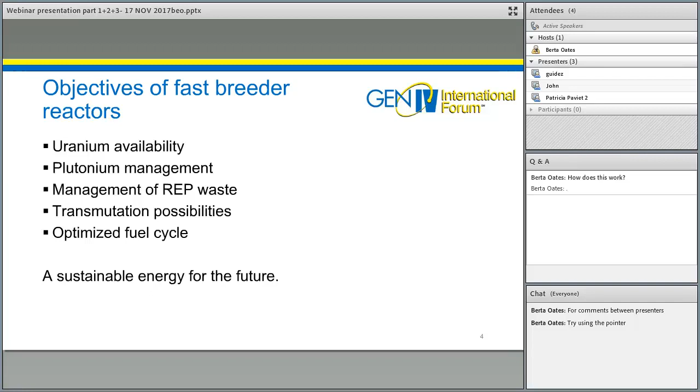Some words on the optimized cycle of the fast breeder reactor. You see on the scheme the reactor optimized cycle, with the possibility to fabricate fuel using depleted uranium, which is very available today, and plutonium obtained from reprocessing fuel. With depleted uranium and plutonium, it's possible to fabricate fuel and use it in the fast reactor. Afterward we carry out recycling activities, and we end up with very little waste, only 4% of the fuel.

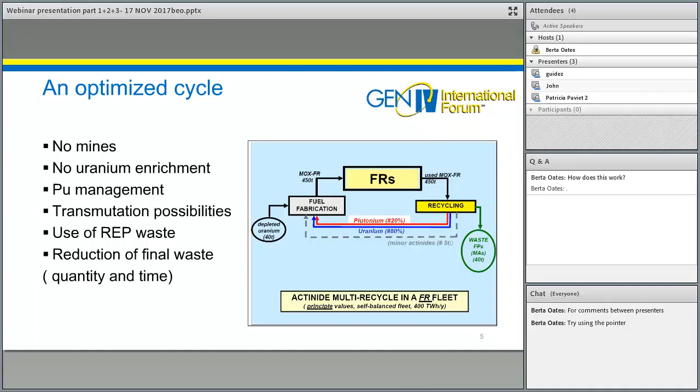For this optimized cycle, we need no uranium mines, we need no uranium enrichment facilities, we can manage the plutonium, and we can also carry out transmutation of the actinides, which decreases the time of toxicity of the waste. We can burn all the waste produced by water reactors, and we obtain a drastic reduction of the final waste, both in quantity and in time.

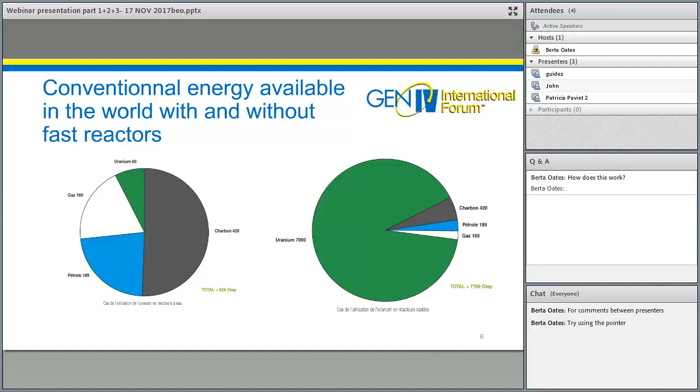With the fast breeder reactor, in the schema we can see the conventional energy available in the world with and without fast reactors. Without fast reactors, using only conventional energy, coal remains the main energy source for the future, which is very dangerous for the planet and for climate change. If we use the fast breeder reactor, we see that uranium can become the main conventional energy used in the future.

In GIF, the International Forum, we have 4 types of reactors that can be fast reactors: sodium reactors, lead reactors, molten salt reactors, and gas fast reactors. But the only type that has been built and operated is the sodium fast reactor. For the molten salt reactor, there was a US prototype many years ago, but it was not a fast reactor. And for the lead reactor, we only have experience with lead-bismuth reactors on Russian submarines.

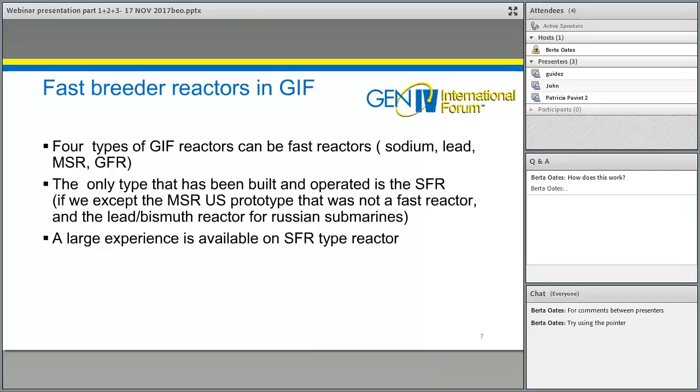There is a large experience available on sodium fast reactors in the world, and in France also. The first nuclear reactor to produce electricity was a sodium reactor, the EBR reactor, in 1951.

20 sodium fast reactors have been built and operated in the world. A lot of countries have worked on this type of reactor: the USA, Russia, France, Japan, India, China, UK, and Germany. The last one to have started is the BN800 in Russia, 800 electrical megawatts, connected to the grid in 2016. And now in India there is a 500 electrical megawatt reactor that should start next year. So you see there is a large experience in the world on this type of reactor.

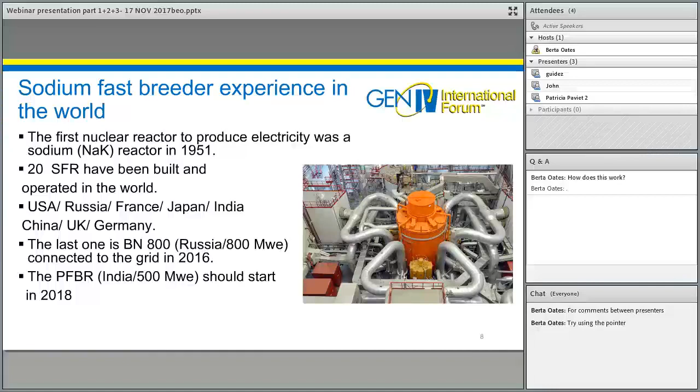For the French experience, we have had 4 phases. The first was Rapsodie, from 1967 to 1983, a small reactor of 40 thermal megawatts. After that we had Phenix, from 1973 to 2003, operating at 250 electrical megawatts. Then Superphenix, which began to operate in 1985 and stopped in 1997, at 1,240 electrical megawatts. After the closure of Superphenix, Phenix restarted following a safety evaluation, from 2003 to 2009, but restarted with only two-thirds of its power, meaning 170 electrical megawatts.

So we see that in France we have a big experience on this type of reactor.

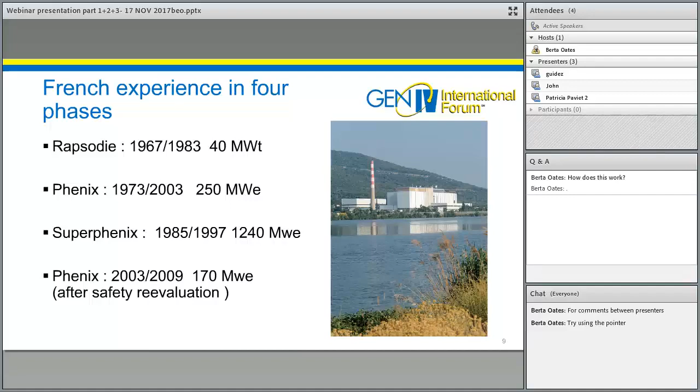The Rapsodie experience was a small loop-type reactor built mainly to test materials and fuel, with no electricity production. The aim was to test materials for structures, components, and fuel assembly during the reactor's life. This experience with structures, components, and fuel was used for Phenix, since Phenix was built during the operation of Rapsodie. A lot of corrosion problems with fuel pins were studied in Rapsodie and resolved. At the end of the reactor's life, very interesting tests were carried out, particularly tests where the sodium coolant flow was stopped at nominal power without any control rod shutdown, to show the intrinsic safety of this type of reactor.

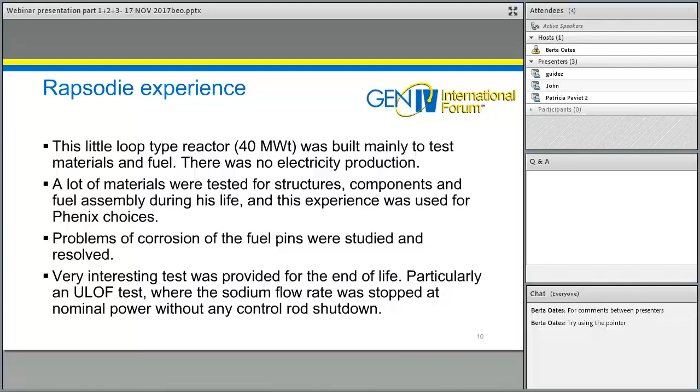For Phenix, the feedback experience was extensive. The reactor was producing electricity, and it holds a special place among French nuclear power plants. It was built in 1968 by an integrated CEA-EDF-GAAA team. It went critical in 1973 and operated in cooperation with EDF, with ownership split 80% CEA and 20% EDF.

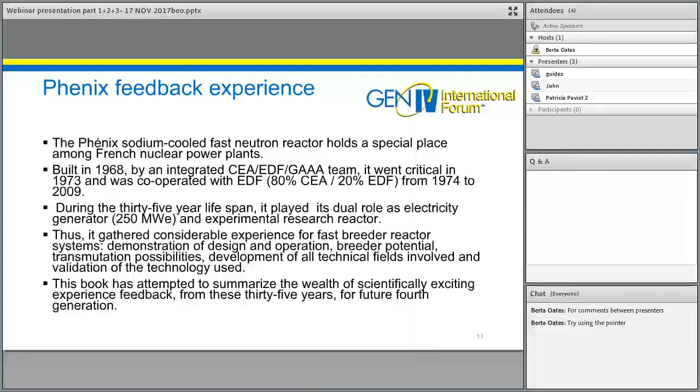From 1974 to 2009, during its 35-year lifespan, Phénix played a dual role as electricity generator and experimental research reactor. It gathered considerable experience for fast breeder reactor systems: demonstration of design and operation, breeder potential, transmutation possibilities, development of all technical fields involved, and validation of the technology used. This book attempted to summarize the synthesis of this exciting feedback experience from the 35 years, for the future fourth generation.

After the Phénix book, we tried to do the same type of exercise on Superphénix. The title of the book was SuperPhoenix: Technical and Scientific Achievements. A huge industrial experience was acquired during the reactor's construction—it's the biggest sodium fast reactor ever built in the world. The reactor was built in 7 years, from 1977 to the beginning of sodium filling in 1984, and nominal power was reached 2 years later, in December 1986.

Despite a complicated political life with strong opposition from ecologists, a great deal of technical experience was acquired, until the reactor was shut down 10 years later for political reasons.

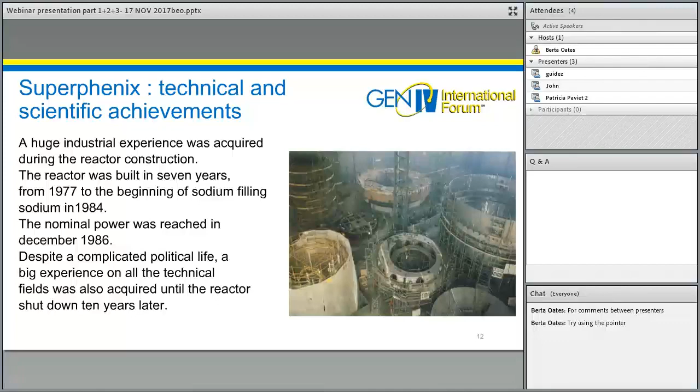The two books were written to summarize this experience. The first is the book on Phoenix, 'Retour d'Expérience,' edited by EDP Sciences in 2012, with a re-edition necessary in 2013. The English translation, 'Phoenix Feedback Experience,' is also available from EDP Sciences.

The book 'SuperPhoenix: Acquis techniques et scientifiques,' written in collaboration with Gérard Prele from EDF, was edited by EDP Sciences, the same publisher, in 2015, with a re-edition necessary in 2017. The English translation was provided by Springer Editions in 2017, titled 'SuperPhoenix: Technical and Scientific Achievements.'

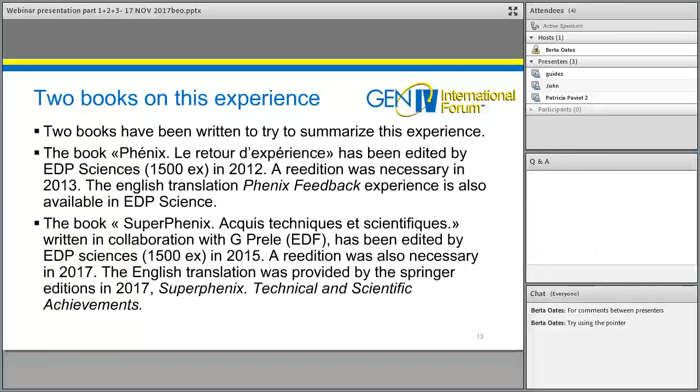So you can see here the two faces of the books. The book Phoenix is a French version from the same editor, EDP Science, and you have the book on Super Phoenix, Super Phoenix Technical and Scientific Achievements, which you can find in the Springer editions.

What was the principle of these books? The principle of these books was a thematic analysis. The books are not organized around the chronological experience, but only with thematic analysis.

The main themes studied are neutronics, materials, components, thermal hydraulics matters, fuel, handling, and so on. The presentation of today will give only 3 examples of all this accumulated experience described theme by theme in these 2 books.

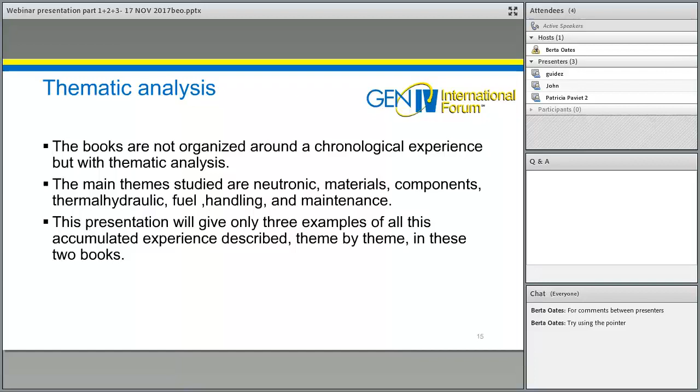The main themes of the Phoenix books, as an example, we have a general presentation of the reactor that is useful because it gives a general view and the general dimension of the reactor, and general data also.

After the objectives of the reactor, after the operational review to see how the reactor has been operated during all the years, the safety review, covering all the problems of safety that can occur during the 35 years of operation.

With all the incidents, all the problems related to the decay heat removal of the plant, that is the main theme, the core physics, with all the neutronic matters, the fuel element, with the experience acquired on the fuel and on the material of the fuel.

After that we arrive at the big components, the intermediate exchanger, with a lot of problems of Phoenix that are explained, and we can avoid now these problems.

All the problems arrived on the steam generators, the sodium pumps, and the control rods. Those are the main components of the plant.

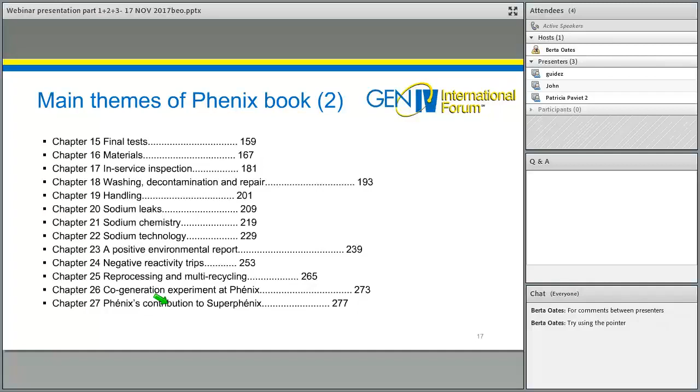All the activity of reprocessing and multi-recycling, a cogeneration experiment, and the Phoenix contribution to Super Phoenix. So you see that we have a lot of very various themes with a lot of technical results.

And in the Super Phoenix book, we come back and have the same types of themes: the construction review of the reactor, all the tests at the beginning to operate the plant during 2 years, with some problems of vibration of the shells.

The operation results of the plant, the problem of safety, especially for the sodium fire experience. We have the operating experience of the plant, the fuel subassembly, all the neutronics matters.

It is the largest core on a sodium fast reactor that was ever tested in the world, and it is an experience that's still very interesting now for neutronics codes.

After that we arrive at the big components: the primary pump, the secondary pump, the intermediate exchanger, the steam generators. We give, for all these components, all the experience that we have had.

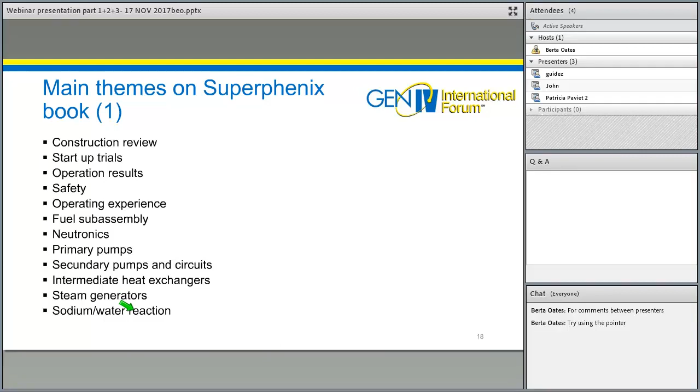After that we have the problem of sodium-water reactions, and the sodium leaks and fires that we had on the plant, and we explain the reasons for the leaks, the reactor shutdown control system, the decay heat removal.

And the materials - it gives a very interesting experience because we have used the experience of Rapsodie, then the experience of Phoenix, and Super Phoenix represents the largest experience on materials to be used for the sodium fast reactor.

After we cover all the problems of thermal hydraulics, which are difficult problems, there's the in-service inspection with new methodology that was tested in Super Phoenix, the chemistry of sodium, how to purify it and maintain a good level of purification, the sodium technology with instrumentation and other matters, handling, environmental results, dismantling - this was not in the Phoenix book. And Super Phoenix's children, meaning all the design experience we tested after the end of Super Phoenix, with Super Phoenix 2 and the European Fast Reactor.

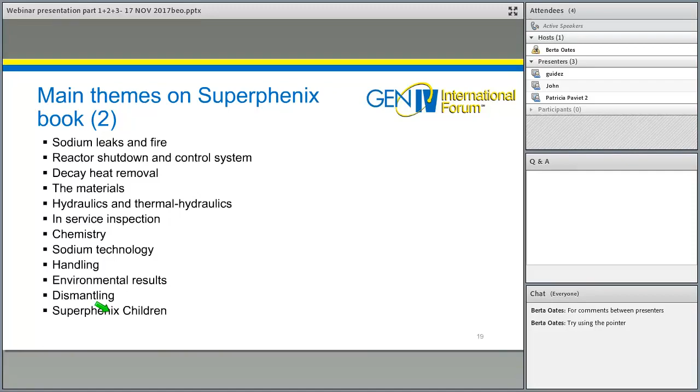Today it's clearly impossible to cover all these themes because it would be a very long presentation. So we choose only 3 examples.

The first example is the reprocessing experience on Phoenix, because it's a unique industrial experience in the world, and because when we speak of sodium fast reactors, we also need to speak of reprocessing, since the two are necessary for the interest of this type of reactor. Next we speak of the SPX construction, because it's an impressive industrial work, the biggest reactor ever built in the world. And after that we speak of the neutronics of the Super Phoenix core.

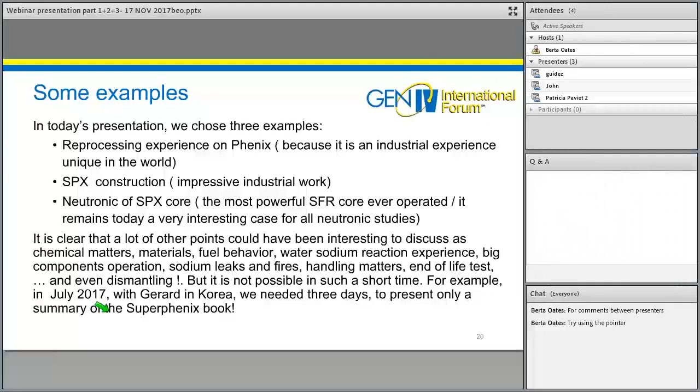Phénix reprocessing, the first case: 520 Phénix assemblies were reprocessed, representing 4.4 tons of plutonium. In 1973, we had the first irradiation of Phénix fuel. In 1980, the first Phénix assembly loaded in the core was built with recycled plutonium coming from the reprocessing process. In 1991, we had the end of Phénix fuel reprocessing activities.

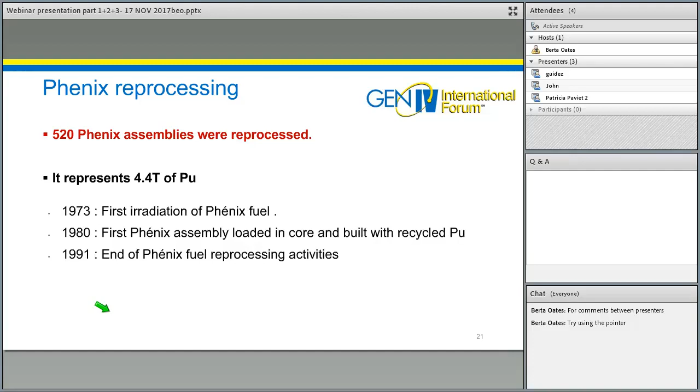Here we have the schema: the years, and the number of assemblies that were fabricated, loaded in the core, unloaded from core, dismantled, reprocessed, and total reprocessed.

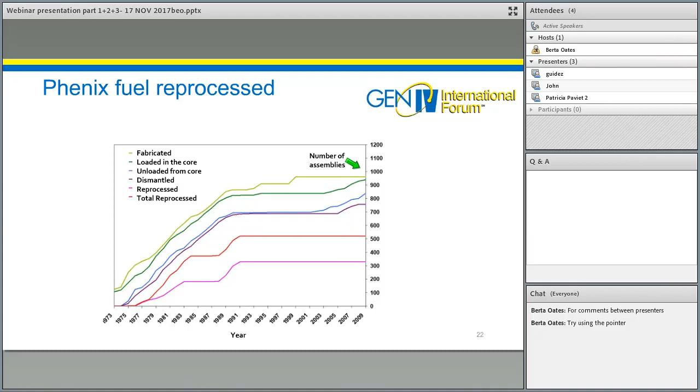This reprocessing activity was made in 3 different lines. The first was the AT1 line in La Hague, the first French prototype facility for fast reactor spent fuel reprocessing. It operated from 1969 to 1977. Capacity was relatively low, 1 kilogram per day, and we tried the processing activity on Rapsodie, Fortissimo, and Phénix.

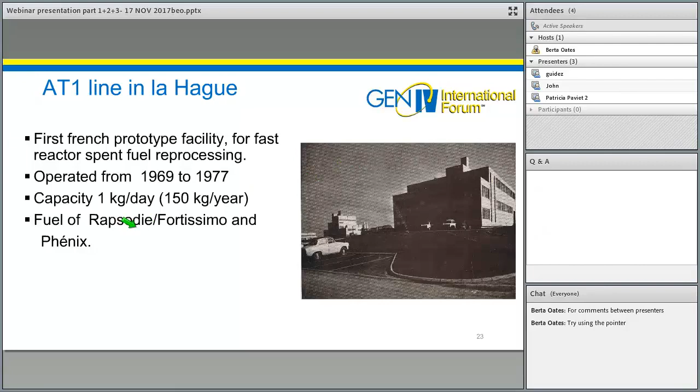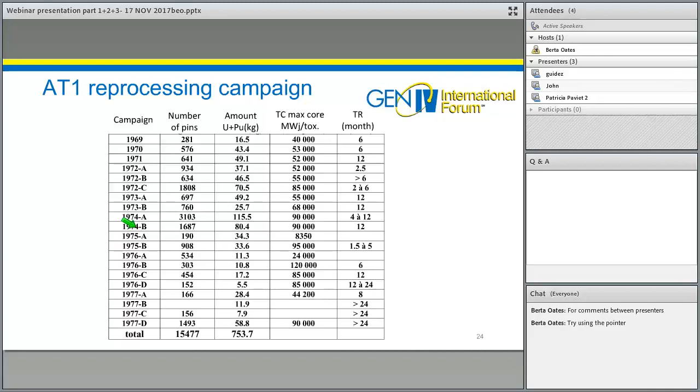Here is the table with all the AT1 reprocessing campaigns, batch by batch, with the number of the campaign, number of pins, the amount of uranium and plutonium, the megawatt-days per ton of fuel assembly, and the months - the time necessary for that. So in this book we try to explain everything that was done in terms of reprocessing on the 3 lines.

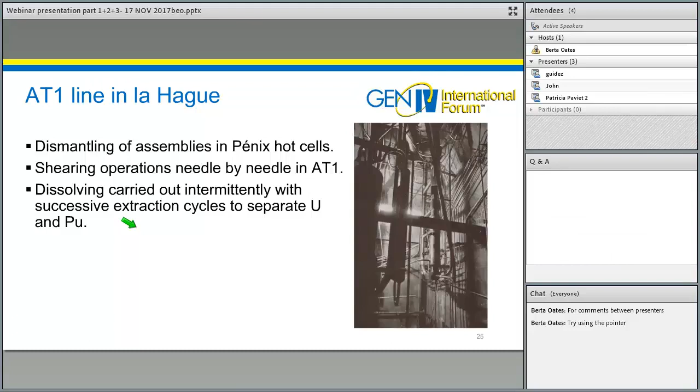In AT1, in Marcoule, and in La Hague. In the AT1 line, we had dismantling of assemblies in Phénix hot cells, after which the shearing operation was done needle by needle in AT1, and the dissolving was carried out intermittently with successive extraction cycles to separate uranium and plutonium.

In the APM, Atelier Pilote Marcoule, the line operated from 1973 to 1983. First, we dismantled the fuel of Rapsodie Fortissimo for KNK, a German reactor, and from 1976 to 1978, the first core of the Phénix reactor. Then from 1978 to 1983, we reprocessed 6.8 tons of MOX core from Phénix.

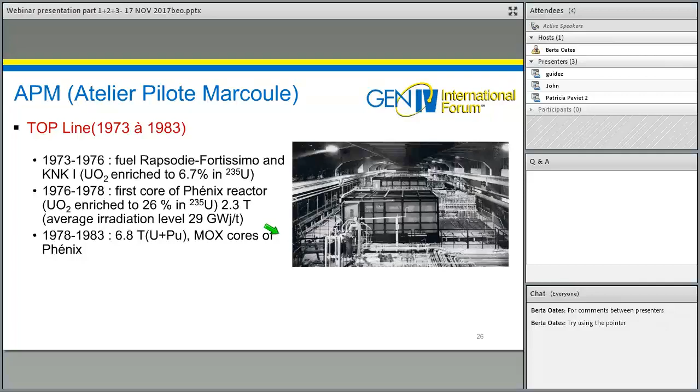After this, the APM installation was moved to THOR, a new installation. In this THOR line, another batch of Phénix fuel was reprocessed.

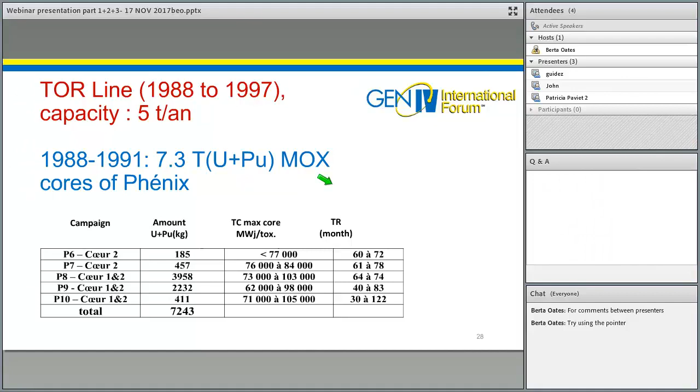After that, we went from 1979 to 1984 to UP2, a reprocessing installation located in La Hague, in the north of France, where we reprocessed 10 tons of Phénix internal core fuel.

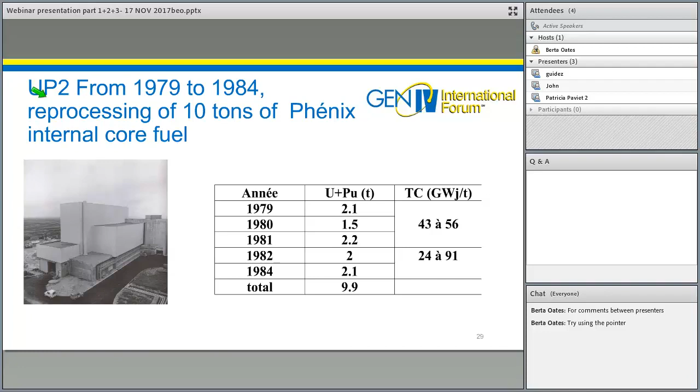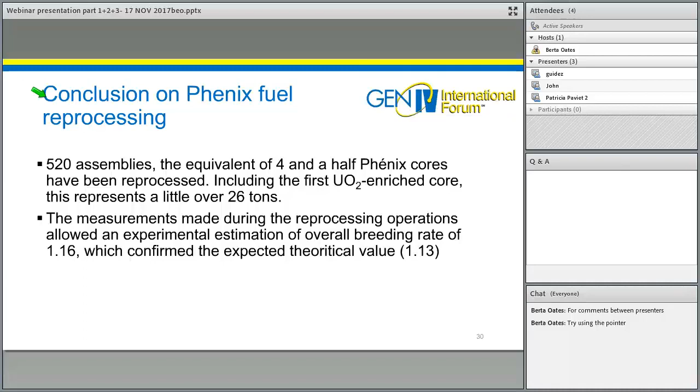In conclusion, we reprocessed 520 assemblies of Phénix, the equivalent of 4.5 Phénix cores - including the first uranium-enriched core. This represents a little over 26 tons. The measurements made during the reprocessing operations allowed an experimental estimation of an overall breeding rate of 1.16, which confirms the expected theoretical value of 1.13.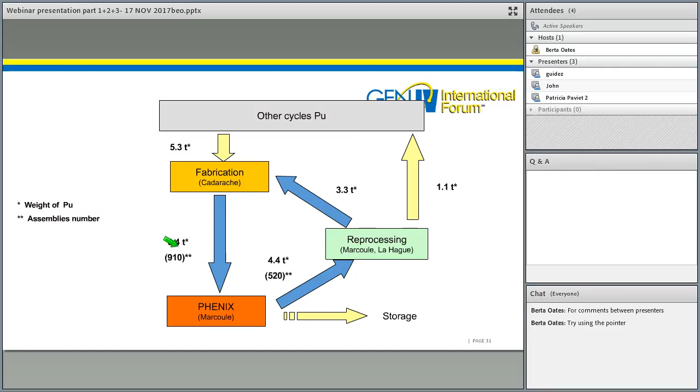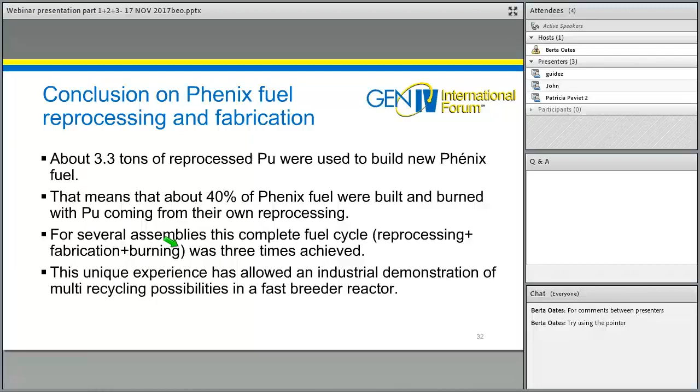So the conclusion of the Phenix fuel reprocessing and fabrication: about 3.3 tons of reprocessed plutonium was used to build the new Phenix fuel. That means about 40% of Phenix fuel were built and burned with plutonium coming from its own reprocessing. For several assemblies, this complete fuel cycle - reprocessing plus fabrication plus burning - was achieved 3 times. This unique industrial experience in the world has allowed an industrial demonstration of multi-recycling possibilities in a fast breeder reactor.

If I go back on the presentation, we have more explanations in the chapter on the reprocessing and fabrication of the book. This is only a summary.

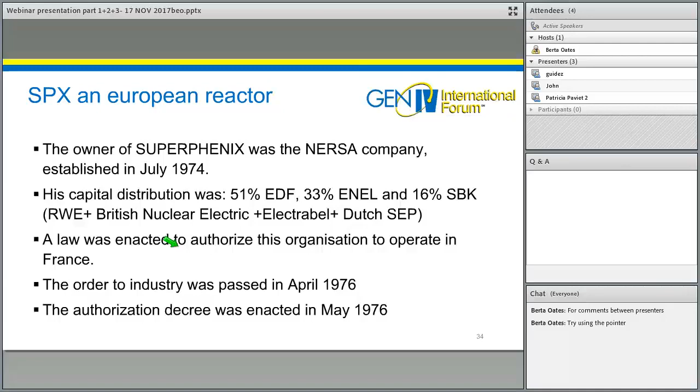The owner of Superphenix was not EDF, it was NERSA, a company established in 1974 with EDF, but also Enel, an Italian company, and also British Nuclear Electric, and so on. A law was enacted to authorize this organization to operate in France. The order to industry was passed in 1976, and the authorization decree also in 1976.

There were some negative consequences of the European organization, because you had to choose, and sometimes it was difficult to choose the best industrial supplier, since each country wanted to get back its money. For the turbine, the Italian provider was Ansaldo, which had no turbine with the power of 1 times 1240 electrical megawatts. The choice of 2 turbines of 620 megawatts was made instead.

Some providers were not well known and sometimes out of the nuclear field, and some technical difficulties arrived later due to their poor choices, such as the material of the drum vessel. This complicated organization was also a cause of extra cost and extra deadlines.

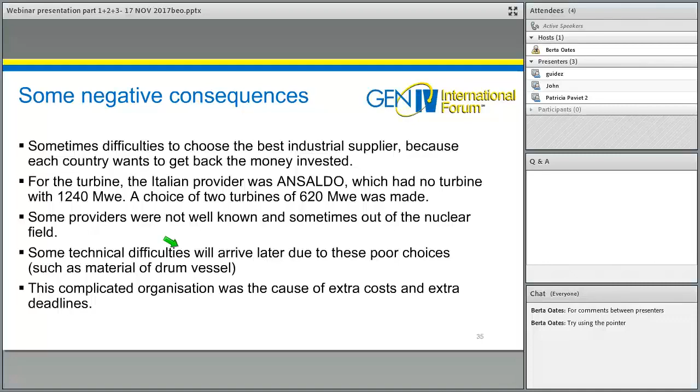We needed to make some exceptional transports. When possible, it is better to manufacture in factory. So all the large components - pumps, heat exchangers, steam generators - were transported to site. Here we see the steam generators arriving at the site in Superphénix.

The rotating plug, in two parts, and the diagrid, 8.9 meters in diameter, were the biggest parts transported by exceptional transportation into the site. Here we can see the diagrid arriving from Italy at the site of Superphénix.

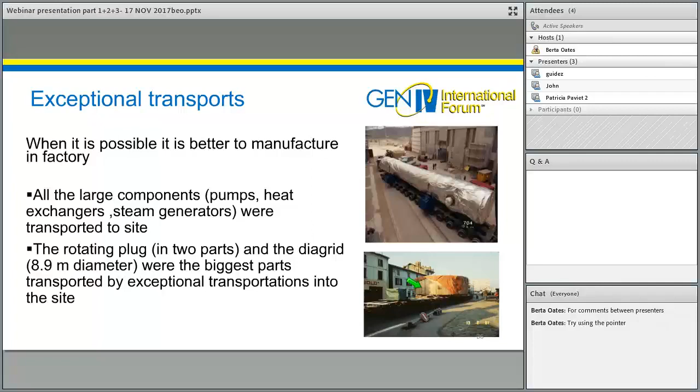Reactor block: so we began the civil engineering work on site with the reactor block construction. The reactor pit and storage drum pit are built inside the reactor block. We can see the pit in construction here.

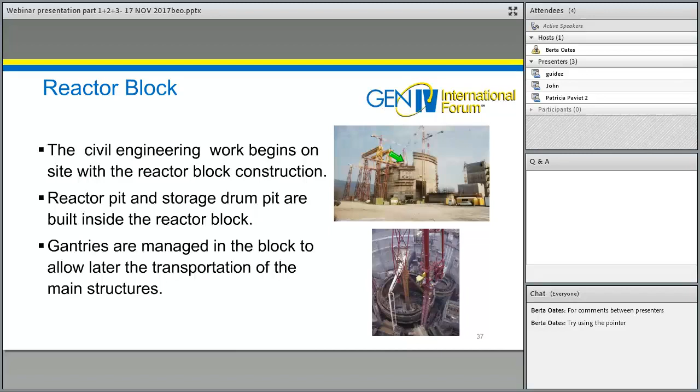We can see the block in construction. Gantries are managed in the block - they can be seen here - to allow later the transportation of the main structures inside the civil engineering.

So you can see the workshop building here, and the hall that will be necessary to introduce the material.

For the sodium reactor, we have a large structure. For example, the safety vessel has a diameter of 22.5 meters and a height of 15.9 meters. The weight is also important, up to 850 tons.

So transportation from factory was not possible, and it was manufactured on site in the workshop building. You can see here the workshop building, the big building, where all the large structures were built inside.

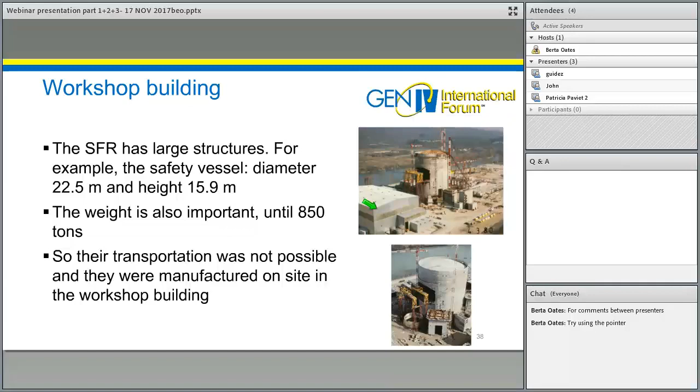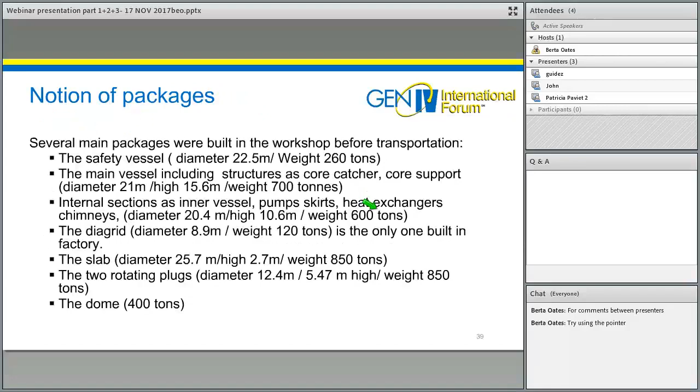Oh, where am I? Ah, there is something missing in the presentation.

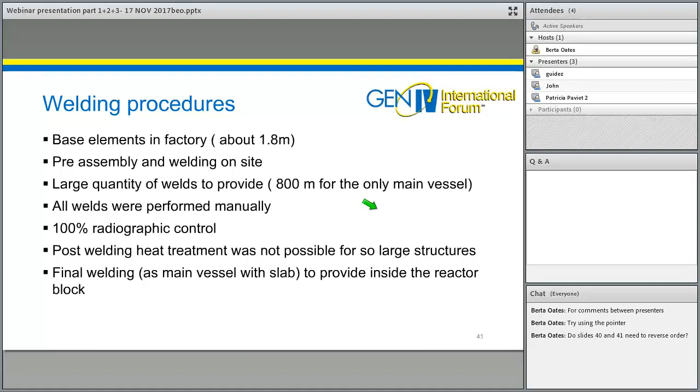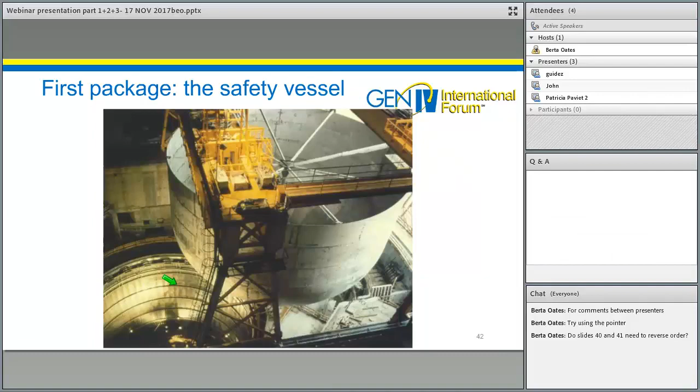So we see arriving all the packages. The first package was the safety vessel. You see it arrives inside the reactor, and we see the air. You can see the pit, and the safety vessel goes inside the pit. After, in the safety vessel that is there, we have the arrival of the main vessel. The main vessel arrives in the safety vessel, and we can see chocks that are installed between the two vessels for the provisional installation.

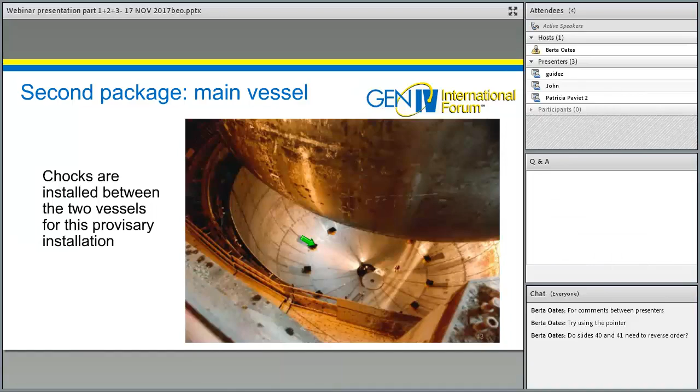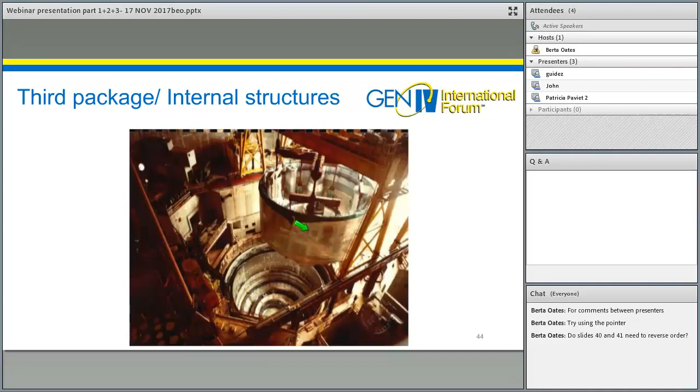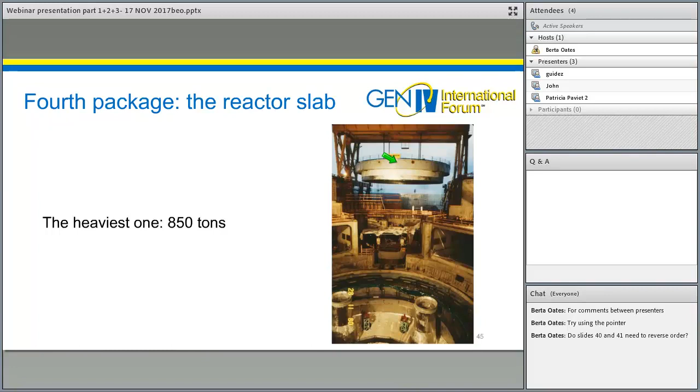After, we have the internal structures that arrive inside the main vessel. We have the internal structures. After, we have the fourth package, the reactor slab. You can see here the reactor slab that is raised above the main vessel. It is the heaviest one, with 850 tons.

The simplified schedule shows that we started in '77, the beginning of the civil engineering operation. We began feeding in sodium in '84, and the nominal power was reached in '86. So about 10 years between the first concrete and the nominal power of the plant.

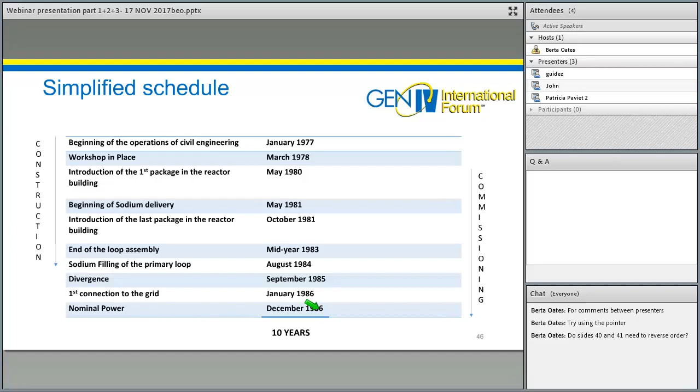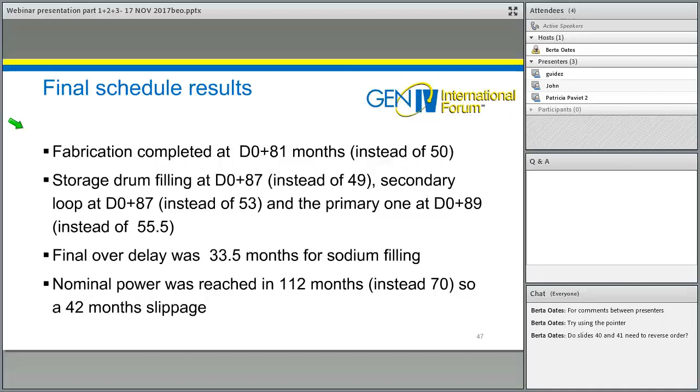Conclusion of this summary of the Superphénix construction: it was successful, innovative manufacturing on site with a workshop, with, in the future, the development of automatic welding adapted to fast breeder reactor materials to be used. It was 7 years of construction for 7.7 billion euros (2012 value). For a large prototype, it is a very honorable performance. The 30 months overdelay could be reduced in a series production.

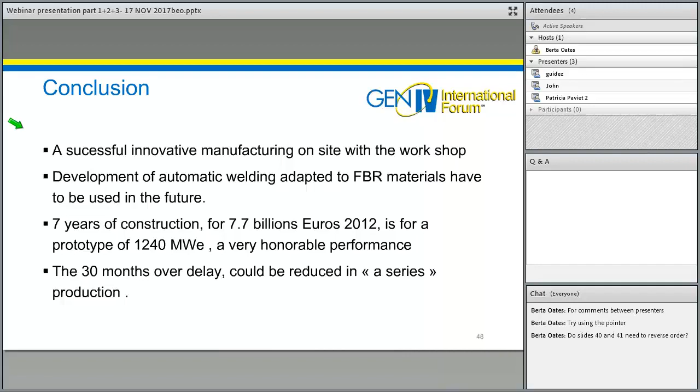Now we arrive at the third example for today: the neutronic operation of the Superphénix core. This core, with 5.7 tons of plutonium inside, was the largest sodium fast reactor ever operated in the world.

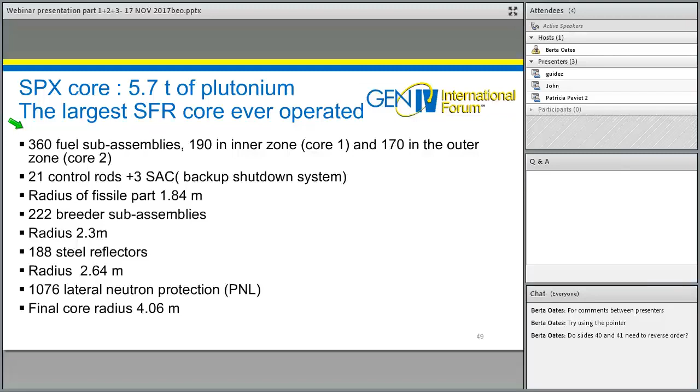Here we have the list of all the elements inside the reactor: 360 fuel sub-assemblies, 21 control rods plus 3 special control rods, 222 breeder sub-assemblies, and you see a lot of elements inside this core.

There were 2 enrichment zones in this core to flatten the flux curves. The fissile core in periphery, core 2, had higher enrichment than the inner core, core 1, and the weight enrichment was different between core 2 and core 1. There was 19.53% plutonium in core 2 and 15.52% plutonium in core 1.

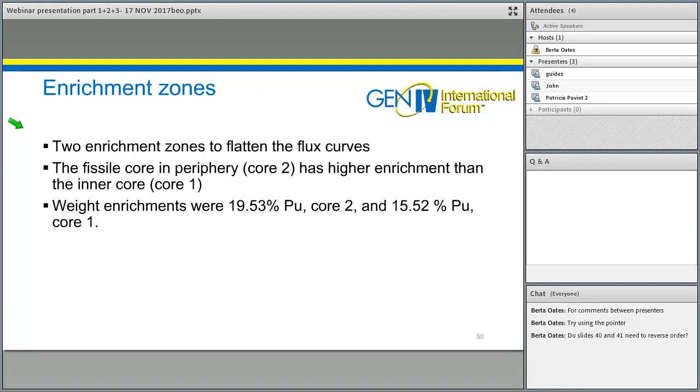The management mode was a cycle of 320 EFPD, equivalent full power days. Each sub-assembly remains in the reactor for 2 cycles, so 640 equivalent full power days. At each shutdown, half the core is reloaded with fresh fuel, and the core is rearranged for the next cycle. It's a frequency 2 management. The first core has an excess of reactivity, meaning a special management for the first cycles.

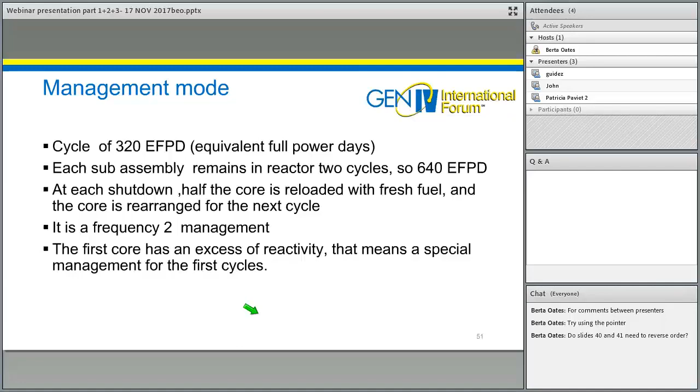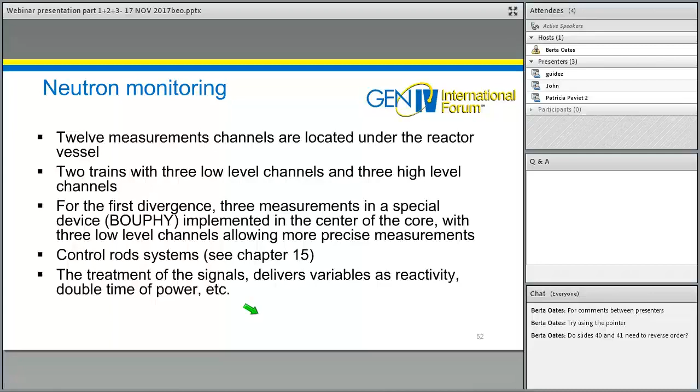Neutron monitoring was managed with 12 measurement channels located under the reactor vessel. 2 trains with 3 low-level channels and 3 high-level channels were installed. For the first divergence, 3 measurements in a special device, BOUPHY, were implemented in the center of the core with 3 low-level channels allowing more precise measurements. The control rod system will be analyzed in chapter 15, and the treatment of the signal delivers the reactivity and doubling time of power.

We have thermal monitoring. The inlet temperature is measured in the primary pumps and used for the related diagrid part that gives the entry temperature in the fuel assembly. The outlet temperature is measured for each fuel subassembly with two thermocouples, chromel/alumel. All these temperatures are managed by the core monitoring system to survey abnormal heating and to calculate the maximal clad temperature in-line.

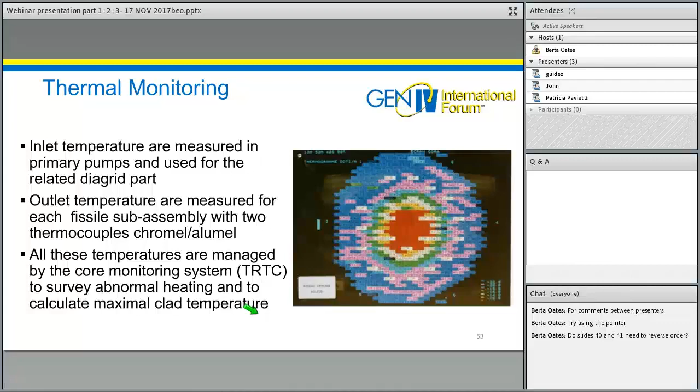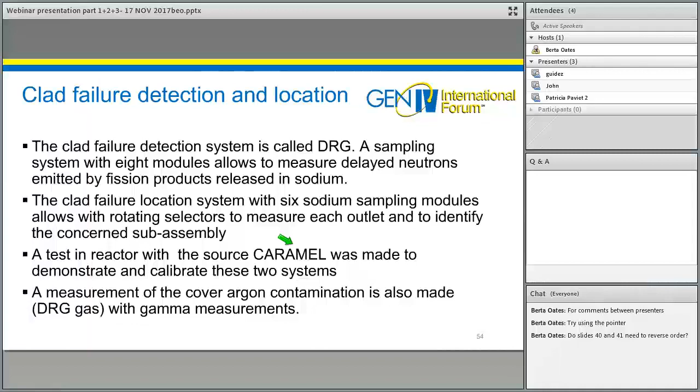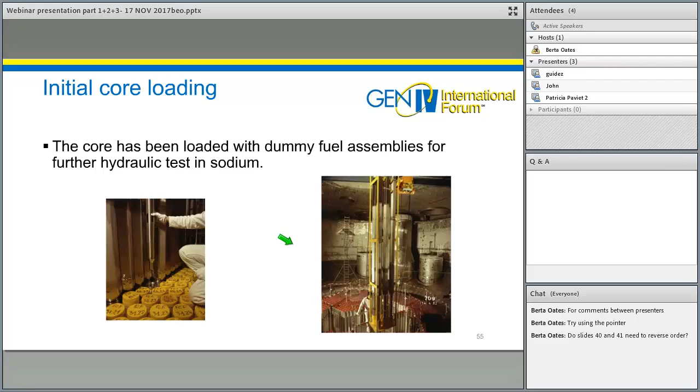After the hydraulic test in sodium, the dummy assemblies are replaced by fresh fuel, by batch. The loading is made by checkerboard approach to criticality. No neutron source was used.

After each loaded batch, the BOUPHY measurements give reactivity evolution. After the loading of 325 subassemblies, a first divergence was achieved. The replacement of the 33 remaining dummy subassemblies was performed in 2 batches.

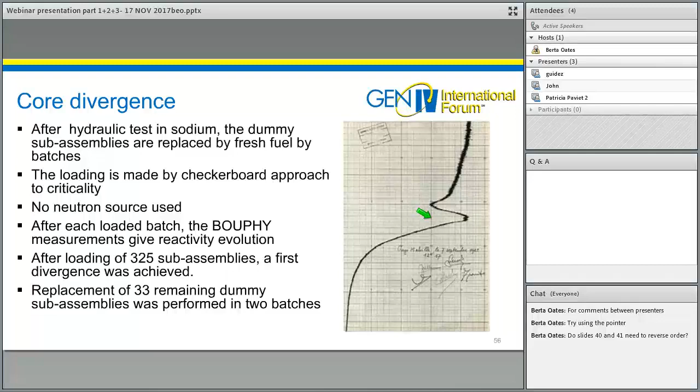Here we have the core divergence measurements from the day of the divergence. There was also a lot of experimental measurements in the core.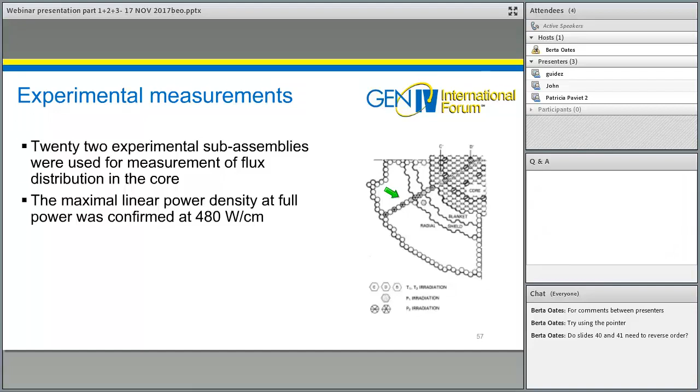22 experimental subassemblies were used for measurement of flux distribution in the core, and the maximal linear power density at full power was confirmed at 480 watts per centimeter.

Here we have the measurement of the counter-reaction coefficient, the coefficient KGH. K is the core inlet temperature coefficient, G is the core heating coefficient, H is the power coefficient. All these counter coefficients are negative.

That assures the safety of the core. The measurements are made by step on reactivity on the primary pump speed and secondary pump speed, and then by calculation with 3 equations with 3 unknown values.

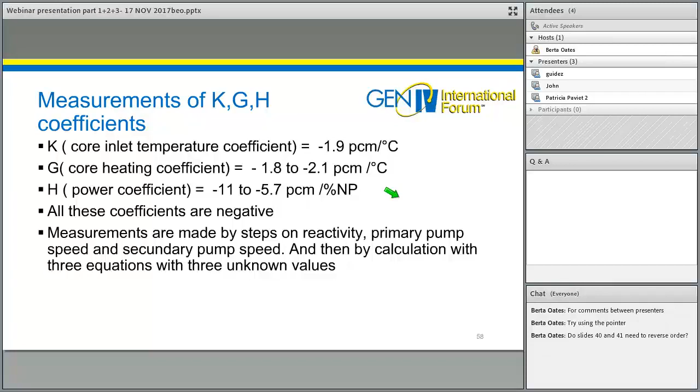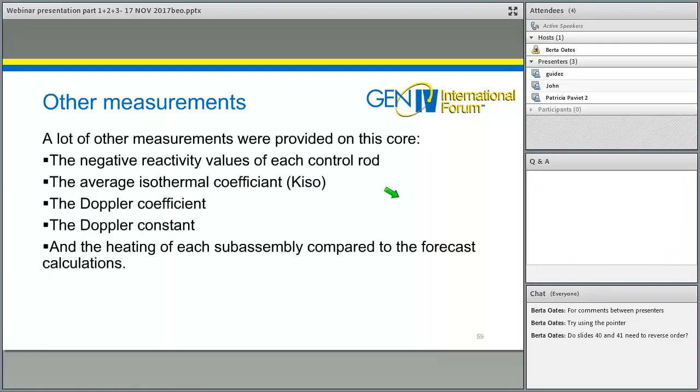A lot of other measurements were provided on this core over about 6 months: the negative reactivity values of each control rod, the average isothermal coefficient, the Doppler coefficient, the Doppler constant, and the heating of each assembly, all compared to the forecast calculations.

The operating experience has shown a lot of things. The core thermal monitoring was efficient to prevent flow blockage.

We had an accident with a rubber plug inside a subassembly foot that was loaded into the reactor, and the little flow rate inside the subassembly was measured, so you can follow the core status at transient situations.

The core neutronic monitoring was efficient, but could be improved. I think it would be better to have complementary measurements inside the core.

We have had some mechanical problems on the DRG-LRG clad failure detection system. We have spatial effects due to large cores, which led to some initial discrepancies between calculation and measurements.

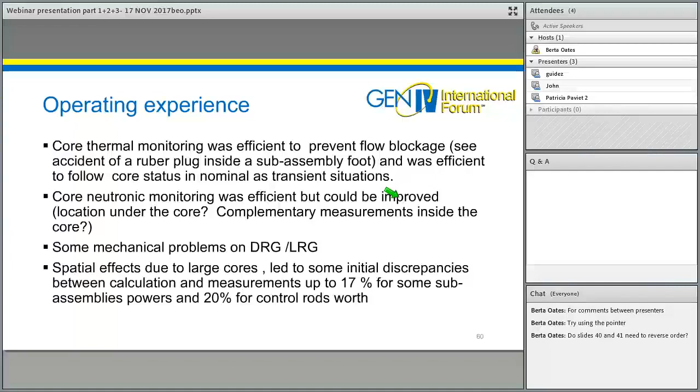Discrepancies up to 17% for some subassembly powers and 20% for some control rod worth. So we had a lot of work on the code to come back and explain this difference.

In conclusion on Superphénix neutronic experience, the Superphénix core with 360 fuel assemblies and about 5.7 tons of plutonium is the largest sodium fast reactor ever operated in the world, approximately 10 cubic meters for 3,000 thermal megawatts.

Loading, divergence, and monitoring options were well validated and didn't give any particular difficulties to the operator. Measurements allow further improvements in neutron calculation codes, and some monitoring improvements were suggested for the future in the book.

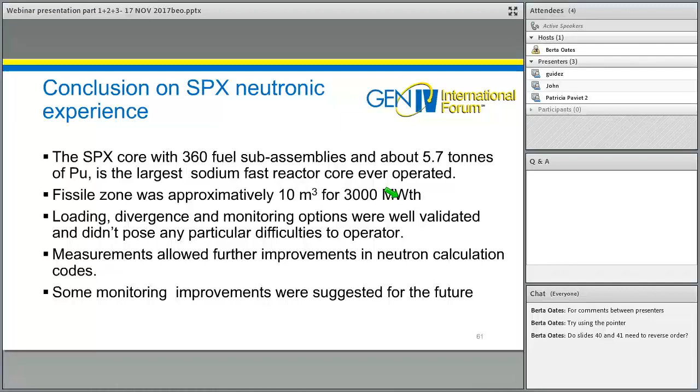In conclusion, a large experience exists with the construction and operation of the French SFR reactors Phénix and Superphénix. These two books on the subjects give the first idea of this experience with a lot of recommendations for each topic. We hope they will be useful for all designers to further enhance the design of these promising future Generation 4 reactors. Thanks again.